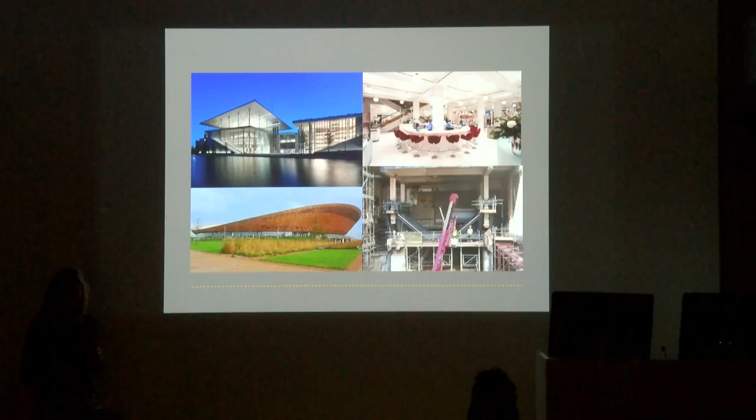And so they do a combination of high profile but also behind the scenes challenging structural and civil engineering, whereas the studio has only been going for a few years, much more modest. A lot of work in education, master planning, getting access to funds for schools, and doing refurbishment. And I think probably the thing that we're most busy in is repurposing buildings. There's a lot of work in London in that, and it's really quite fun. And that's where having engineers in-house with me is very helpful, because you can all work together in problem solving.

So we have a history, as Will said, of doing bridges, and the Millennium Bridge really probably almost before your time. 20 years ago, we did the competition, myself with the founding directors of Expedition while I was working for Foster's, and then went on to win that and build it. And lots of lessons learned really throughout the project, but also, of course, when it wobbled on the opening day, which was a real eye-opener in terms of never say never about the behavior of a bridge. They're like little creatures, really. Never quite sure what they're going to do. We went on to do this bridge in Stockton as the Expedition studio practice since that time.

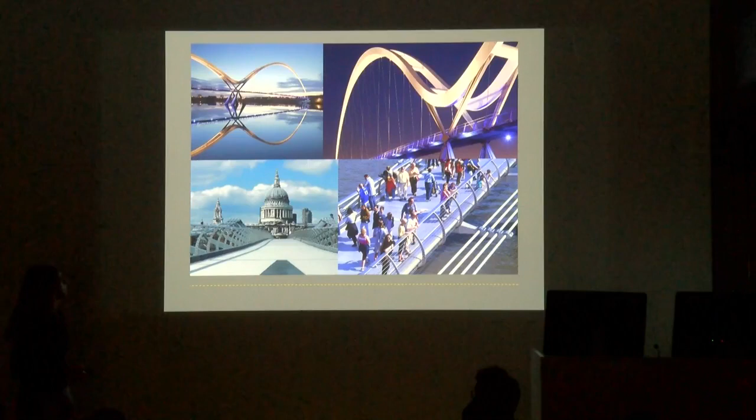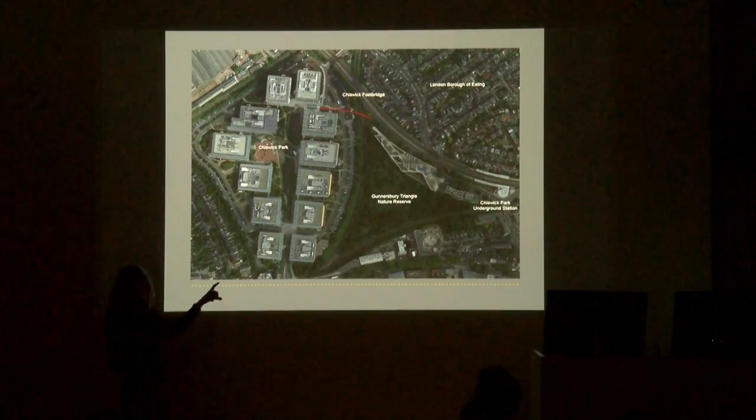And so this is an aerial of the Chiswick Footbridge that we'll be talking about today. And as Will said, this is Chiswick Park on the left. The red line of the footbridge, it's crossing between Ealing and Hounslow, so the challenges of 2 local authorities and the negotiations with those. Also the Gunnersbury Triangle, which is a much loved nature reserve. And then this big residential development, which was built in the life of this project. And the thing that I'll speak about is that it's actually been going for 15 years, the negotiations over this footbridge, and now finally due to be finished in the next couple of months.

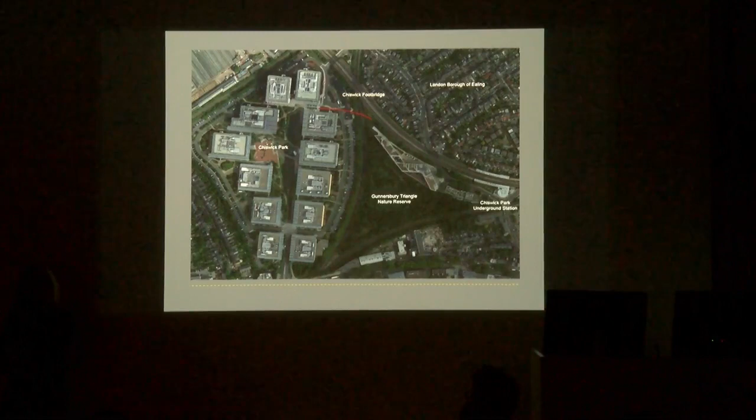So long, complicated process. And what it is, it's the outcome of a Section 106, which is an agreement which the owners of Chiswick Park entered into, where they promised, in effect, to produce this bridge before the end of their development. So it was reliant on building 8, which is right at the top end of the park, one of the largest buildings there. They can't let this building until this footbridge is in operation and available for public use. So the 15 years, they were aware of this, but they sort of put it off as much as they could, right up until the final window when Building 8 was built. And right now they've got to get their act together with this bridge. And it's sort of touch and go whether it was ever going to happen.

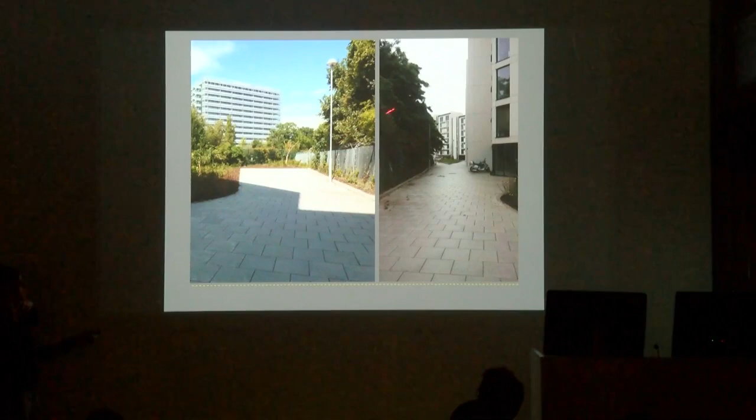And so the character of Chiswick Park is, well, it's got a fantastic landscape spine down the middle and all these buildings in a Richard Rogers style. The aesthetic is very distinct and continuous throughout, very stainless steel and crisp and tech. And we were aware of this when we were generating the scheme for Chiswick Park, and how you sit in the context of all those very precise buildings with your footbridge. So that informed the aesthetic. The other side is this very white, sinewy ribbon residential development, and this is with the abutment sort of sitting here waiting for a footbridge to cross a railway, as well as adjacent to a London Underground line at the top end of Gunnersbury Triangle.

So there's the railway, Network Rail, 24-hour operation of this railway line, and London Underground there that we scoot along the edge of. That's the residential line, and Chiswick Park. We also had a road with a very active bus network on it and a car park to cross. So very complicated. The only thing we're lacking is water. So we had every other context that we had to get across in the development of this bridge.

And it was required because this bridge had to be fully assembled on the site and lifted in one piece, fully built, because what you require when working with Network Rail is something called a possession, where you basically pay for a window when the railway is closed, huge sums, hundreds of thousands of pounds for 24 hours. You book it about 18 months in advance. Everything is geared toward this lift.

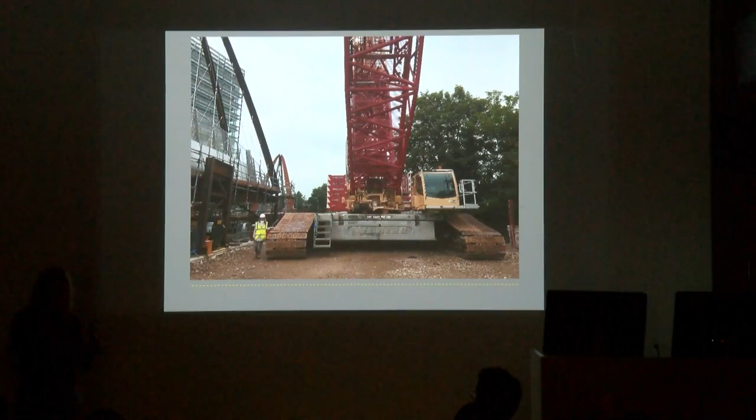And then this crane has got to do exactly what it's meant to do, and it's all pre-programmed. Its lift and its swing is all pre-programmed with computers. You've got backup drivers in case somebody has a heart attack or faints. So all the logistics are driving toward that, including the design of the bridge itself. This is it, going into position at dawn in the summertime. So everyone gave a huge sigh of relief when this primary span went in over Network Rail. So that was the ultimate goal, and now I'm going to sort of pick the bridge apart and explain why it is what it is.

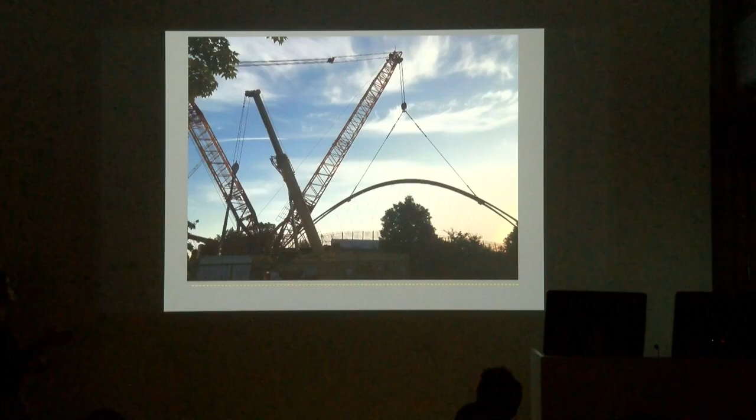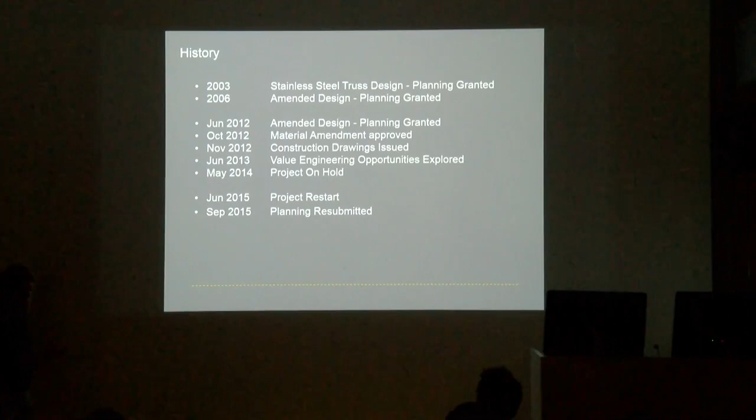But just to touch on the history, as I say, it started in 2003. We first started working on this project. And at that time, it was quite a different scheme. The client was Stanhope, who owned the park at that time, not Blackstone, who are the current owners. And the industry was different in terms of views about material use and sustainability. So the bridge at this time was actually entirely built out of stainless steel. And it was a very low slung structure, which meant it was working quite hard. Arches are much more efficient than low trusses.

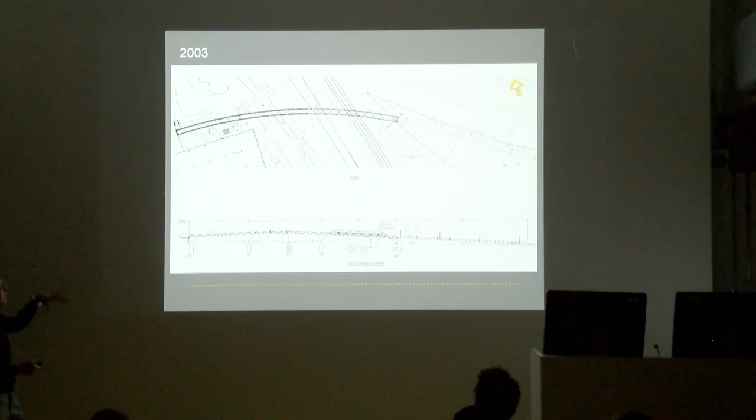And in the course of history, the bridge stopped really because the building stopped on the Chiswick Park site. And when it revived again, this is the stainless steel bridge, we thought, hang on a minute, here's an opportunity to revisit what we were thinking about. Is a stainless steel circular truss actually appropriate? Should we rethink? And as a business, we've been very involved in something called MEICON, which is minimizing energy in construction, as well as something called MAGIC.

And these are sort of professional pursuits around how to use less material in construction, whether it's architecture or any of the industries associated, but in structures particularly, there is a lot of evidence to suggest that things are very often over-structured, to be over-safe or to have a sort of load of disaster built into them, which means things are unnecessarily heavy, which means the foundations are unnecessarily heavy, the shifting around of materials is unnecessary. So there's a sort of pursuit for paring back. And that happened in parallel.

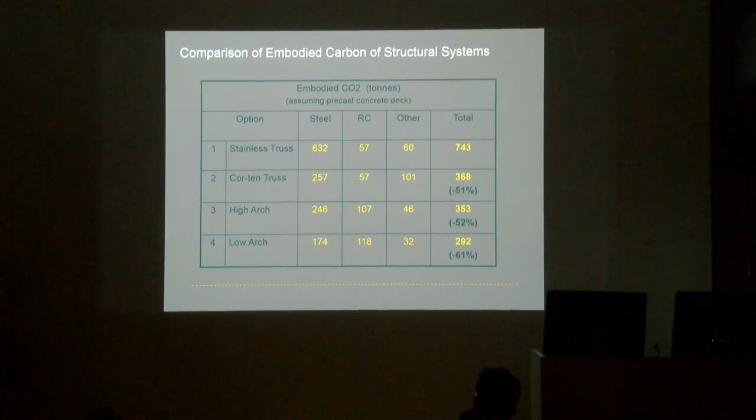So when we came back to this, we thought, right, here we are, quite inefficient, and we could actually be much more efficient if we were an arch. And we looked in quite a lot of detail at the embodied energy of the different ways, and you can see things getting more and more efficient and requiring less and less material as you go into the arches versus the trusses. So then in 2012, this concept emerged. We were then moving from Stanhope to Blackstone, who were quite pleased to have their own design of the bridge, and said, right, let's scrap the old one and pursue this one, especially if it's going to weigh less and potentially cost less and be easier to build.

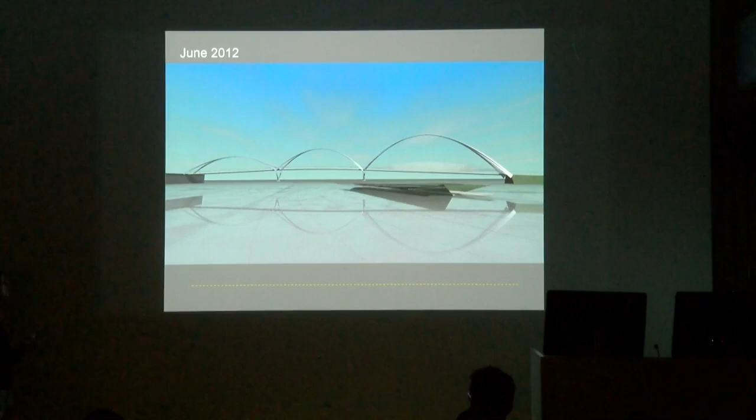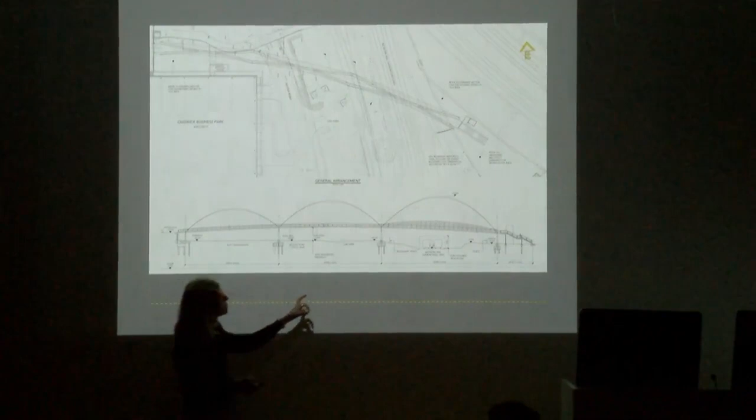So then this diagram needed to be thought through. And I should say there are three key spans, really, because we had to think about the three lifts, all being driven by this primary one here. I can use my gadget. This is the Network Rail line, and being mindful of that limited lift.

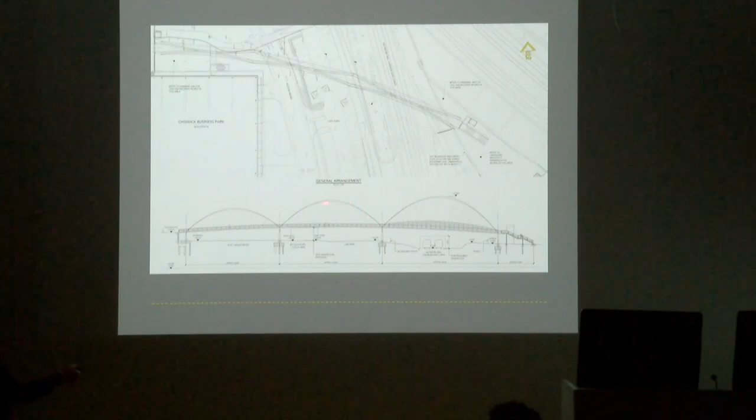So one contained span there, a footprint just on this side of the railway, another jump over the car park, and then another jump to get to this existing podium here at Chiswick Park. So we have to run right up against this building. So we've made a series of steps, and this one is the longest span, the highest arch, and it was a little bit of a journey in the changing character. Here we're mindful that we're in front of a building and not wanting to be too majestic in taking away the views of the occupiers of that building.

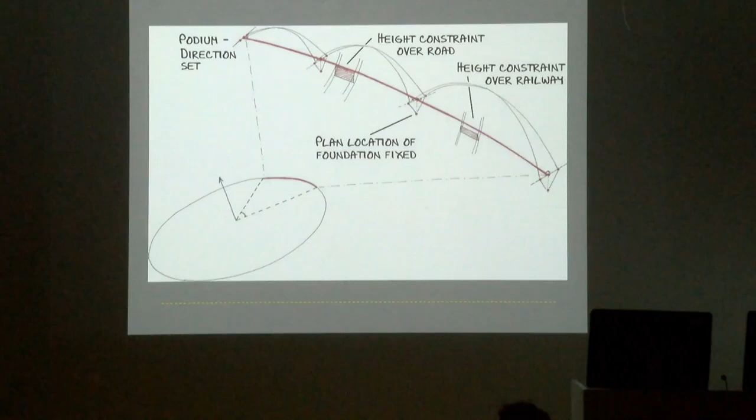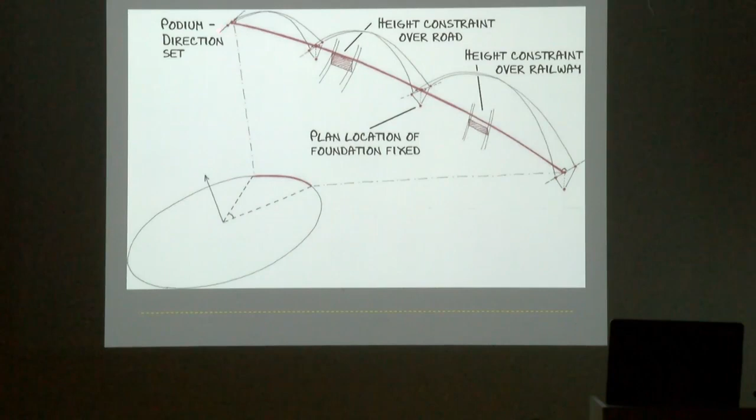So the same solution changes in character, and I'll speak a bit more about this little eyelid here on this bridge, which is very specific to Network Rail. We inherited a series of constraints, which is typical of bridges. As I say, we have to get over the railway. We need to get over this road. There were some existing foundations which were built quite early on in the life of Chiswick Park, and then the podium was sitting there waiting for us for these 15 years.

And having considered an arch, this was then when we went into intense analysis of how to pare back the arch. So not just any old arch. We wanted to use corten, which has very interesting characteristics in terms of maintenance, which I'll speak about in a minute. But how can we get the finest, slimmest arch ever achieved? And this is because bridges are just another version of having to span like a floor plate. The thing about bridges is you really do want to be super pared back in terms of material. And you need to really last for a very long time.

A typical life for a building is 35 years. For a footbridge, it's 125 years. So you've got to be thinking, how can this thing survive with very little maintenance? It's a piece of public infrastructure, so it'll probably take a beating, and it must be there in 125 years. And you then have to demonstrate this to all the interested parties and stakeholders in Network Rail, and you have something called a Category 3 check. So with a bridge, it isn't enough that you engineer the bridge yourself. They then employ a completely independent set of engineers to review everything you've said. So this sort of rigor becomes much more significant alongside our interest in paring back materials as much as possible.

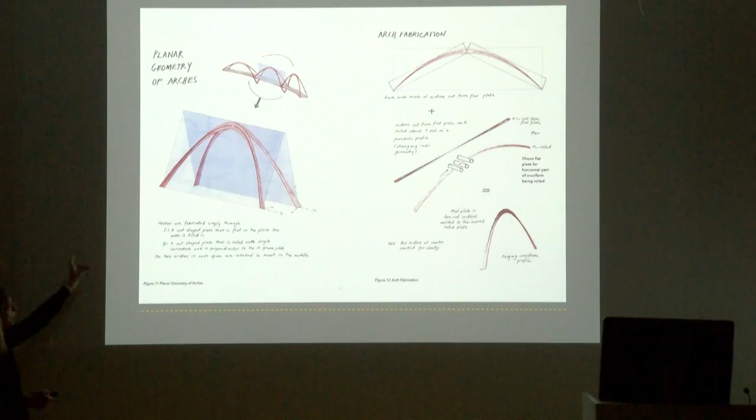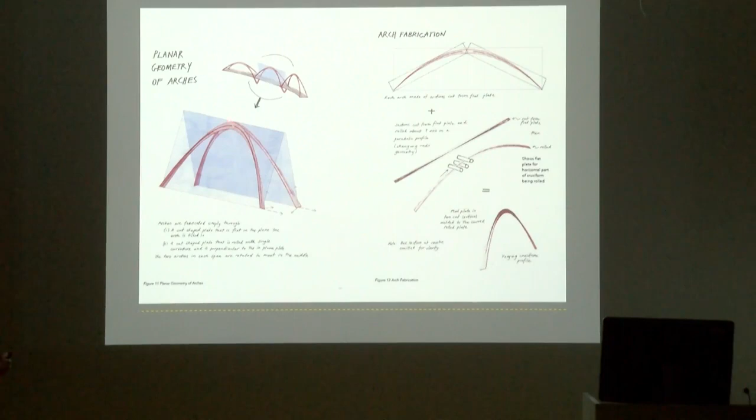So the arch is actually a cruciform shape. It starts quite wide at the base with a sort of flat spine, and then as it goes up to its primary apex, it's a very tall spine with an almost negligible flat portion of the cruciform. So it changes its geometry across the bottom here in that character. That's directly related to the way that the arch is working in terms of its force, whether it wants to do this or it wants to be that. So this is all in this pursuit of paring back. So rather than just a big box section, it's actually a skeletal arch.

So corten, again, it's an American brand for weathering steel, which is that very distinct orange looking steel. And the beauty of corten is that it comes out of the shop, and for us, the plates were delivered to site looking totally gray. And within a matter of hours, it begins to form its own inherent rust. And that rust protects the steel from any sort of degradation. So it's a sort of natural seal, and it has that orange character, and even if you scratch it, it reforms itself this protective coat. And what that means critically for bridges is it doesn't require any painting.

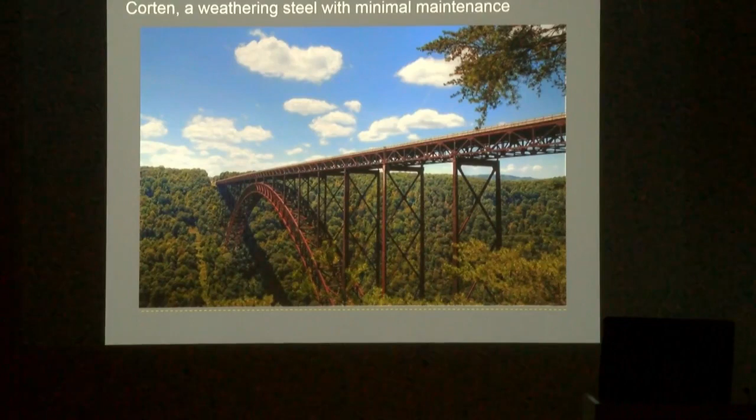So with these sorts of things, you can imagine trying to get back there and paint that and inspect it for corrosion in the connections, virtually impossible or very, very difficult and challenging. And when you're over Network Rail, you don't even have that option. You can't afford to have a possession of £100,000 every time you want to go and inspect the bolts and do a quick paint. So this thing had to be absolutely self-maintaining, hence the desire to use corten steel.

And again, this goes back to my point about the Rogers scheme, very, very crisp aluminium and stainless, and us wanting to be distinct. We would never be able to get the bridge to be as pristine as their beautiful cladding and stainless steel. So let's choose actively to be something different in character. And we do have a lovely engagement with the landscape at the top of the triangle, so it begins to take that character rather than that of Chiswick Park. And these are some images inside the triangle, very natural and wild.

And this is the animal beginning to be formed as a concept with the primary structure in corten, as I described, jumping over the Gunnersbury Triangle in that image and into Chiswick Park. That's the building which cannot be let until this bridge is in operation. So it's sitting there fully assembled and empty at the moment.

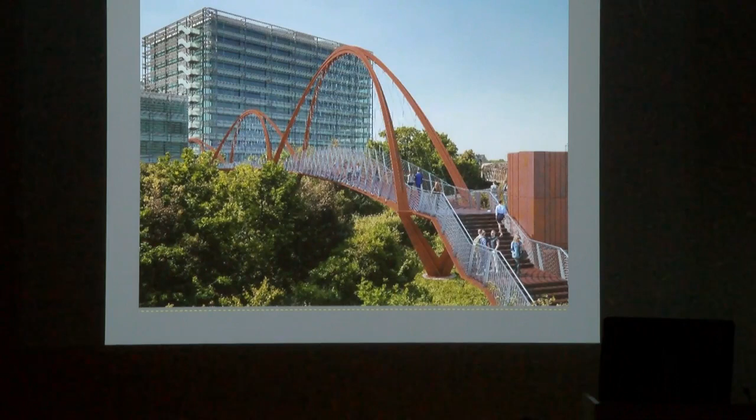You can imagine the money lost while they wait for this bridge to come to life. And it has already taken on this beautiful orange quality, which is really very distinct. And we had to do a lot of views, actually.

It does exist here, I just show this because this is an example of the interest of stakeholders. The Gunnersbury Triangle interest group were very anxious that this bridge not be too dominant when they were in their landscape. There's a lot of bats who live in this triangle, and they were very worried about the impact this bridge may have on their well-being. So all those sorts of concerns had to be managed.

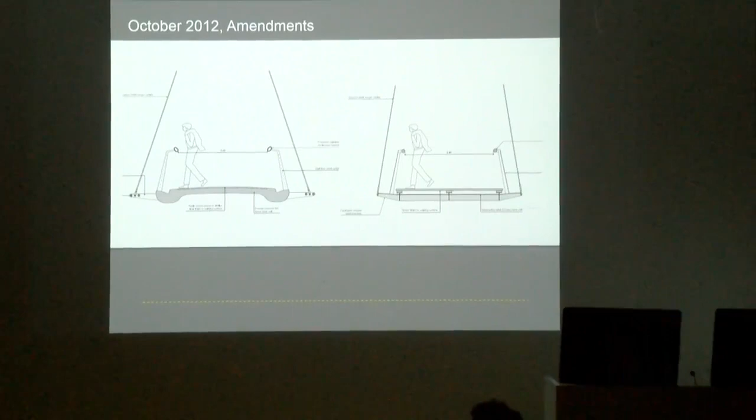Some other things happened over the life of the project. We didn't actually go to a corten deck in the first instance, we started with a concrete deck, and I think this is typical of designers - the longer time you have, the more you feel you can tweak things. So we had this 15 years, it stopped and started. We moved to corten, and then we had concrete. We thought concrete's not as environmentally friendly as it could be, and we've already got steel, so we started with concrete, and then had a review and went to corten.

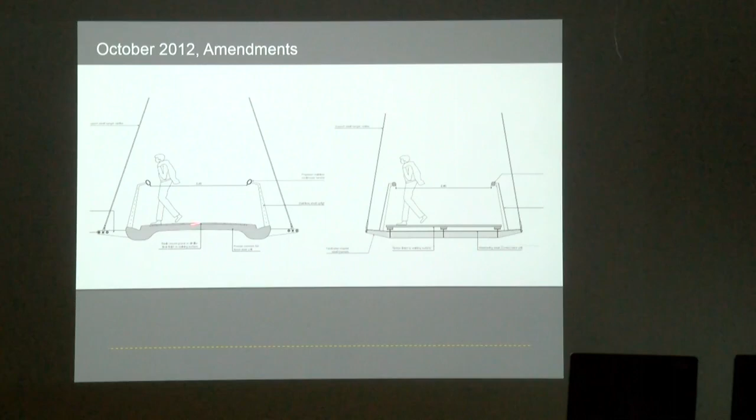This weighs even less because we were able to cut out all the weight that forms the depth of that slab, to get it to be self-spanning across the 2.5 meters. It's now a series of plates. The deck itself is literally just a single plate of steel with a series of stiffeners - super thin, stiffening edge, and then timber, which is self-spanning itself, hardwood sitting on the top and upright. So trying to pare it back to the minimum amount of materials and the minimal palette of materials as well, and all things that last forever, really.

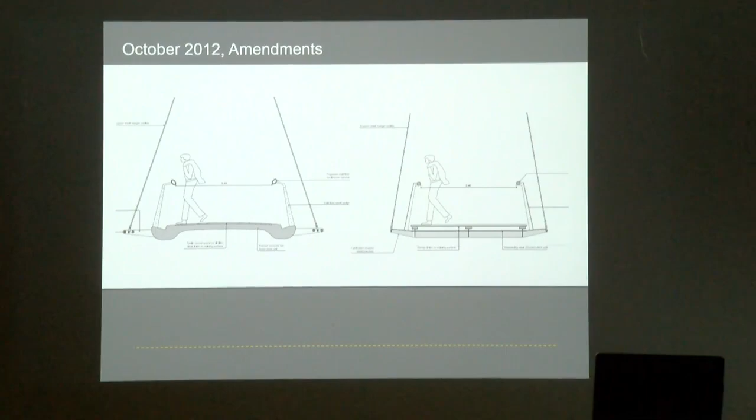We look to the Stockton Bridge as a sort of precedent for how we'd achieved this before, and how it can have much less impact on the eye line, really, mindful of people's views, and again, the people in Gunnersbury Park, paring it back.

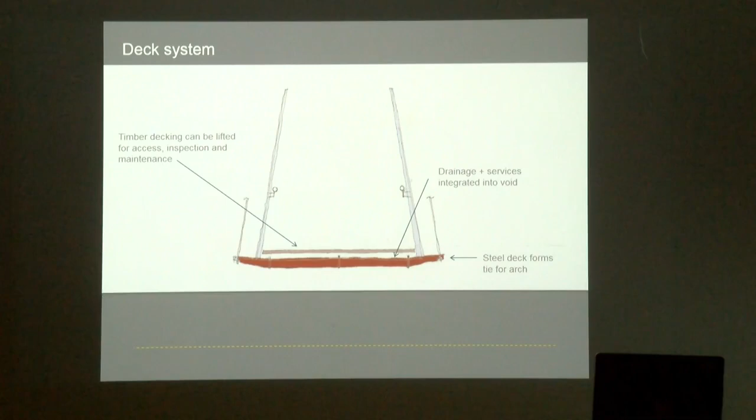So that's that diagram - the drainage. It's self-draining, the deck, the water goes through, the bridge is on a continuous camber, so it drops through the holes in the deck and then flows to either side and then off. You have to be able to manage any water that this thing collects - can't just dump it onto Network Rail or onto people's cars in the car park. It all has to be collected and then channeled down at either end, the whole quantity of rainwater on the bridge. So you're then integrating civils, you've got rainwater experts, you've got to be sure you've got a walkway that you can walk on, structures - all those guys working together in the same interest.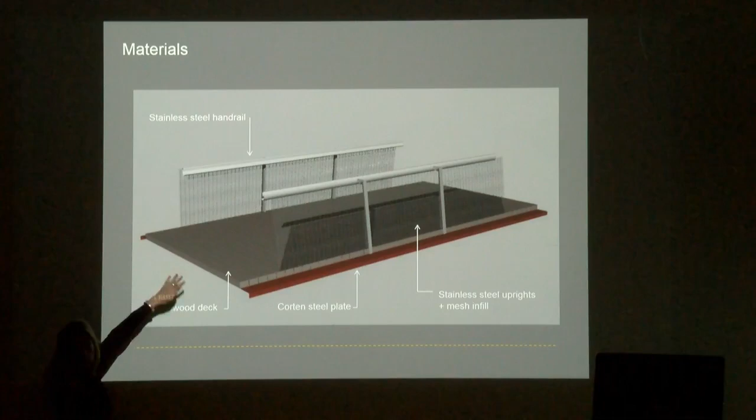This begins to pick up what this material palette is. So here's this plate, the corten plate, set with spanning hardwood deck. This, being mindful, it can't be softwood if it's got to survive 125 years. And then all other materials which make up the balustrade system are stainless steel - again, something which is self-weathering, isn't prone to corrosion, very tough, and has a very long life. Even the infill between the uprights is also a mesh comprised of stainless steel. So three materials, and that's it.

This is a mock-up. To be sure that the interfaces were really resolved, we built a one-to-one mock-up. You can see the profile of the corten, the beginnings of these stiffening fins, checking the welds, checking what the character is of the underside, and then how to get, in the simplest fashion, the build-up of the timber and the fixing of the uprights.

And this is really a lesson. Again, we did a lot of research leading up to the Millennium Bridge, and that's a much longer bridge, 3 times as long, and it doesn't benefit from the same surveillance. But bridges take a real kicking - people are just prone to sort of shaking them around and kicking them about, and you have to be mindful of that. They also steal things - a lot of them have had many of their light fittings stolen.

So you have to be mindful of what can look, if it can, look better over time, but withstand that sort of hard work and still have a level of elegance. And it's trying to work that through, having special fixings which can't be undone, and also trying to dissuade people from climbing out on the side and doing things which are a bit mad.

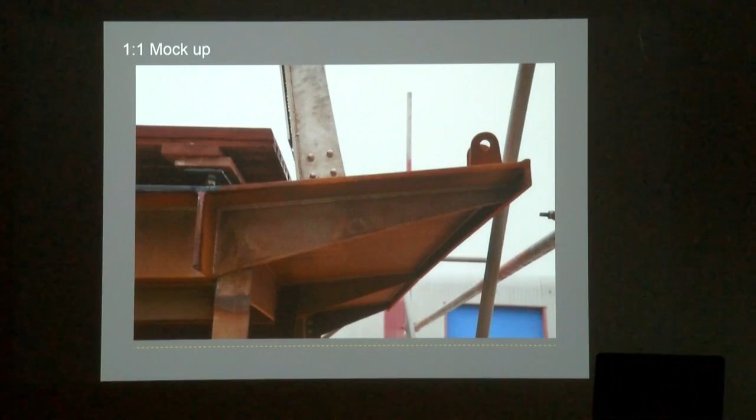And I still see, to this day, I cross the Millennium Bridge and see people's footprints on the cables - you know how the cables go out to the side over the Thames. Whatever you do, people will still go out and walk along on those cables, which is mad. You can see the footprints because they've got protective paint on the cables, and it leaves the impression of those shoes. You can only go so far, but if you can try and dissuade people from doing that in your design, that's also helpful.

So this is what the underside looks like. Now the 3 spans are in position, but you can see the sort of skeletal belly to the bridge, and it really hits home just how unbelievably slender and light this thing is. There isn't a single piece of extra steel, really. We've been very rigorous, and it's taken a lot of modeling and a lot of convincing. In fact, Severfield, who have built the bridge for us, were not convinced that it would work. So when they inherited the scheme, they did their own version of a Category 3 check to convince themselves that it was actually going to be possible.

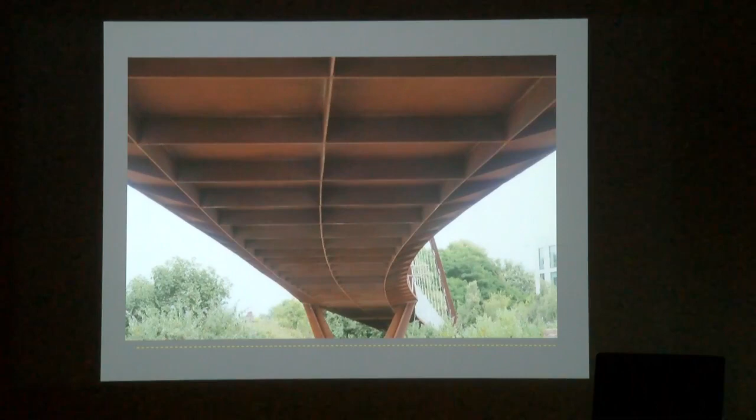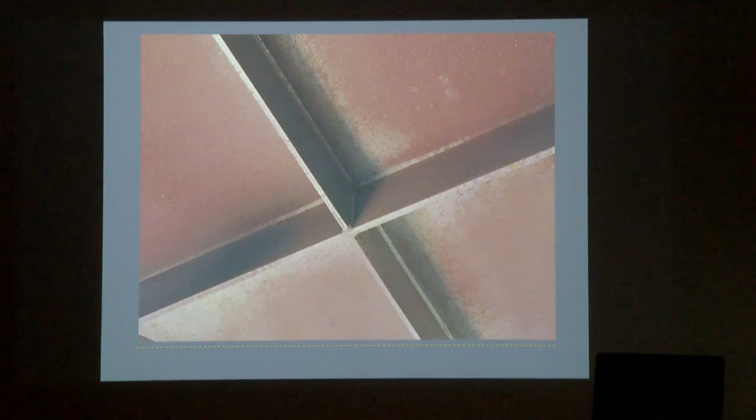And it has given you this really lovely soffit that you now experience in the car park and in the road, and this lovely cruciform detailing. It's really about getting the guys and girls building the bridge to love the welds and take as much care in the fabrication of this thing, and be mindful of the delicacy that needs to be maintained if possible.

Another thing that changed over the life, and this is very critical to the bridge dynamics, is that the cables changed. We started with vertical hangers like on the Stockton Bridge, but throughout the course of testing the dynamics, which we're now quite aware of having survived the Millennium Bridge, we began to experiment with cross cables - this is actually called a network arch. These are very rare; people don't tend to do them. I think there's a couple other instances in the UK of this type of arch, because the cables are working very much in conjunction with the arch and the deck.

I should say the deck has structural stiffness in it, so that's why those little blades are in it. It's not to carry people's weight, but to give the deck enough stiffness to hold it out and to hold the arch out at the ends and to hold these spreader angles of cables. It takes a lot of analysis and a real rigor in the design process to get this to work.

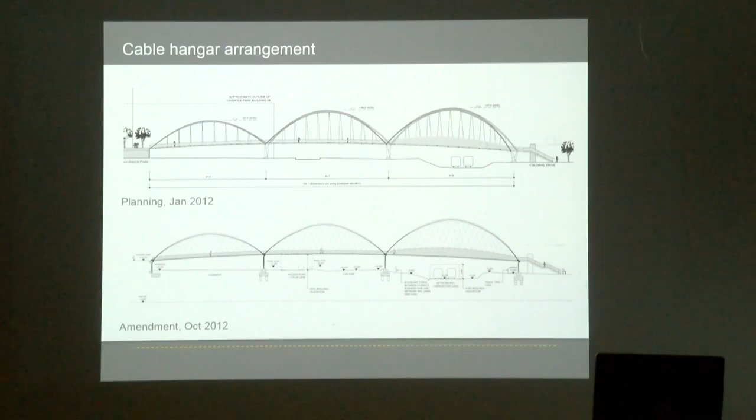But what we found was that we hope, although I never say never, the conversion from a vertical cable to a cross-network cable means that we do not require dampers. The bridge is super stable and steady and very tightly tied together through the character of this network of cables.

And this is a built condition of the top of that arch. Again, you can see this pushing the hole in the arch all the way to the top as much as we can. It comes up as two legs, joins and kisses at the middle, and then back down into two. Again, paring back every piece of material - it probably started down here, and nibbled right until the very end for minimal steel.

And here's a visualization, but it looks very much like that in life, of these two kissing members dropping down again. You can see the cruciform profile changing in its character, and in this mesh sort of lattice that surrounds you as you go. That comes down either side. The cables are 16 millimeter in diameter.

And this is again something which this bridge shares with the Millennium Bridge. These aren't a spun cable - they are a locked coil cable. It's a much stronger cable, super dense. If you look at the cross section of a spun cable, there's a lot of fresh air in the cross section of that cable. These are very strong and effective for achieving that super stiff arch that I described for the design.

These little members, which exist every time the cables cross, are also significant. It's lovely, you get to engage - these are built by an Italian outfit who do all the work for the ski lifts, and they're sort of masters in managing little beautiful bits of jewelry almost associated with ski chalet lifts. But what these do is they stop the cables from rattling. If they start jangling against each other - I don't know if you've ever been to a yacht club and you can hear all the sort of stays jangling against each other - we were mindful of the noise, but also the fatigue that might put the cables into if they're constantly shaking against each other.

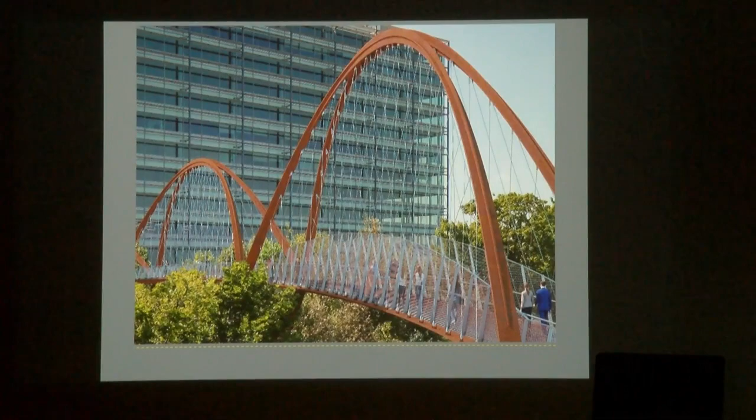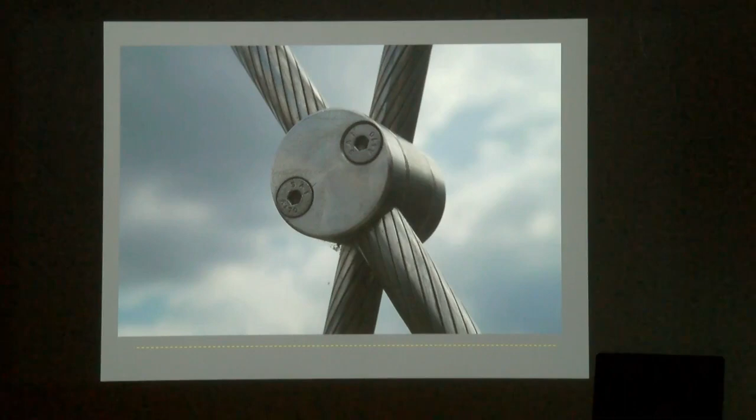These little things had to be custom made for every junction in the cable, of which there are many as they go across the network. Surprisingly, this is where you sort of learn as you go. They're adding an additional level of strength to that network, which forms the tight, stiff arch.

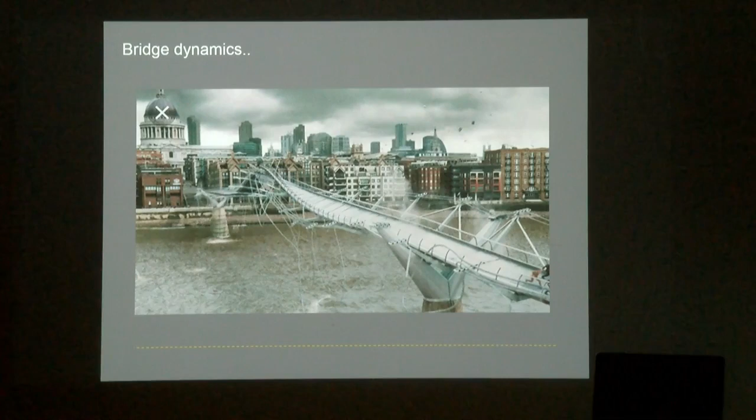Just a little bit on dynamics. I mentioned this because they blew this up in the Harry Potter film, which was not what actually happened, thankfully, just a film. But as I say, we did have to go back and retrofit these dampers to the underside of the soffit. Two different types of dampers actually, mass dampers as well as viscous dampers that we had to put in. So quite a lot of retrofit work to get the Millennium Bridge to calm down.

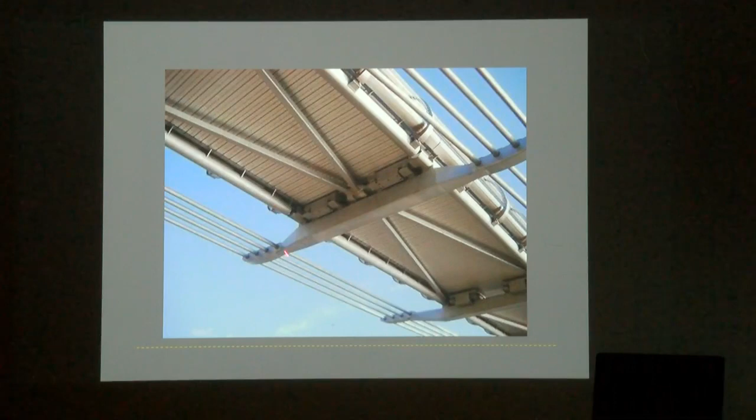So now I'm going to move on to the deck. I spoke a bit about the timber, I was trying to work through the different materials. What we wanted here was for the timber to be not just a finish, but to add another level of importance in the makeup of the bridge. So its weight is quite important. Hardwood is super dense, so it then adds to the ability to settle the bridge down.

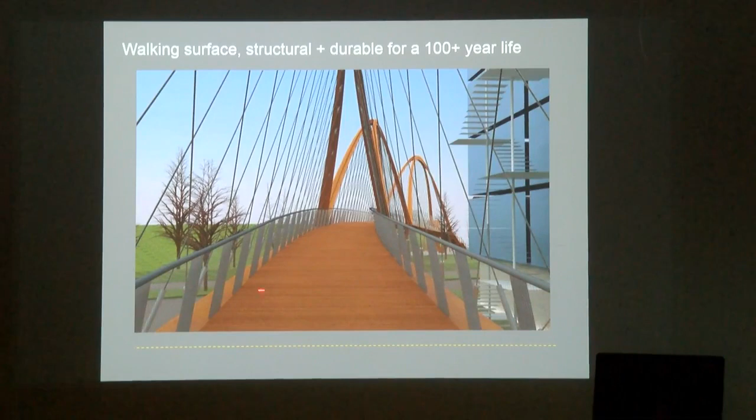Not enough though, again it's this fine balance between what you want to lift up and move over a railway with a huge crane, but at the same time be beneficial. It has a very long life, it's self-oiling, it looks after itself, it weathers to a natural grey. It spans beautifully from side to side with one support in the center, and it's a sort of structural finish. It drains through the middle, as I say, and it also forms your final walking surface.

So doing many things all at once, inspired by the Pont des Arts in Paris, which has been there for a very long time, with a much thinner profile, but a hardwood deck.

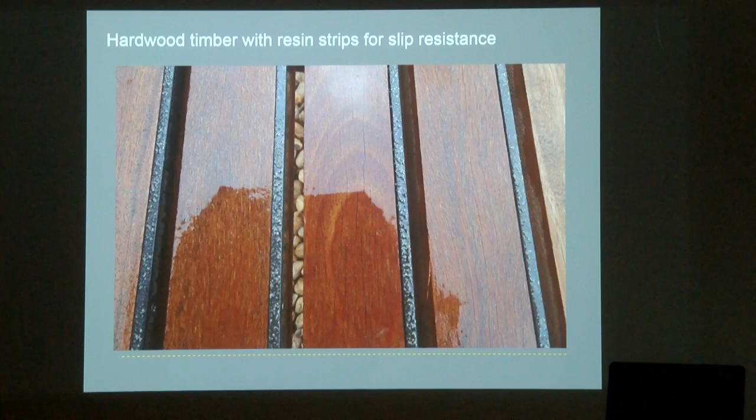We looked at a few different systems for how to integrate slip resistance, because the trouble with timber, even a hardwood, is that it gets very slippery when wet. So we had to be sure we had the right sort of gap for the draining and enough frequency of these slip-resistant resin profiles to get code-compliant slip resistance in wet conditions, especially because the bridge is on a camber, so you're then going downhill in the wet. And we needed to test all of this.

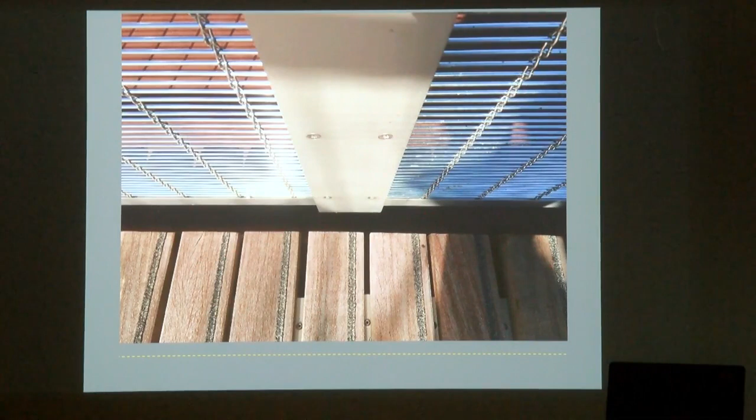This is the sort of color that the timber will weather to naturally over time. It's already begun to do that, in fact, a sort of silvery grey. You can see it here in the built condition, stainless steel, corten deck in the distance, and then these planks already beginning to weather on the bridge itself.

This was a big driver for the characteristic of the balustrade system, in that Network Rail are very anxious about people throwing things or themselves onto the railway and stopping any rail traffic from happening. Their default is to do this sort of thing with their bridges. We started the dialogue with Network Rail, and they said, you've got to absolutely cage over the top of your bridge, you've got to have a complete enclosure, it's got to be X meters tall and absolutely enormous, and that's the end of it.

We thought, well, if we basically asked the question, if we can demonstrate that we're adhering to all your criteria with a different solution, will you accept it? And they sort of grumbled a bit, so we took that as a nod, and then went down a long path of demonstrating that you don't have to have a cage over the top of your head, and that you can produce enough protection without doing that, because we were very keen not to lose the sense of the sky. I think there are a lot of security problems when you put a cap on an enclosure. People don't feel very safe going down a route like that, so we were absolutely determined to pursue minimizing this criteria as much as we possibly could.

Just going back to this cross section, this is a typical condition of a balustrade, usually quite high on footbridges because people feel a bit exposed. It tends to be around 1.2 up here, and you can lean on it.

They get a bit nervous when it goes down to a typical 900 to a meter. But what needed to happen over the railway, at least where we negotiated, is that in the most extreme case it had to come right up to near 3 meters. So rather than boxing up over the whole length, we negotiated to have an eyelid shape. We agreed to go up to that height, but keep it open to the sky.

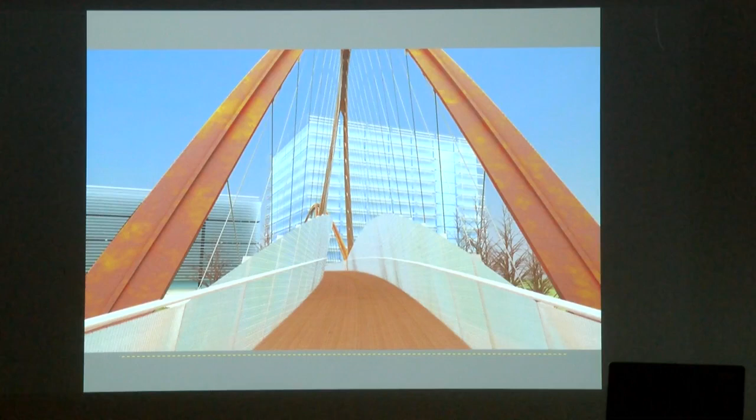That's where the sense of this scallop shape began to come into fruition. Because the bridge is not only on a camber but also on a curve, the geometry is quite complicated, so you never get that long tunnel vision. It's an emerging experience, and we modeled the bridge in 3D and checked the walking environment, convincing ourselves it would feel really pleasant.

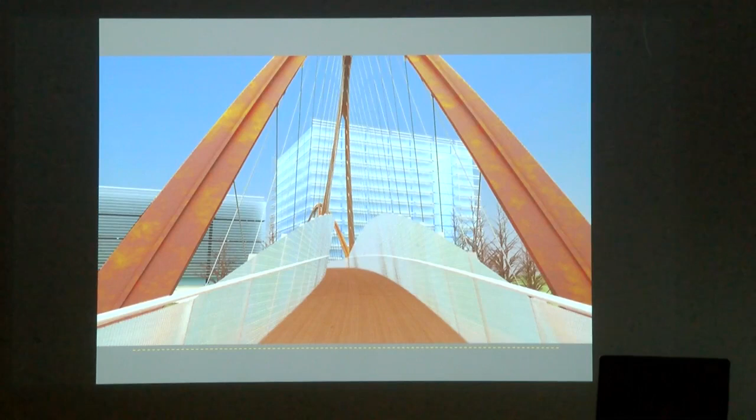We were then very keen to have a dense enough mesh so people couldn't throw anything through, I think the criteria was a 6 millimeter opening, so you can't get anything significant onto the railway. Our mesh had to meet that criteria, but we could still see through it. So children come along and get a long view of the railway, can see the train coming, rather than reverting to a solid balustrade, which is Network Rail's default. Very important to get these things achieved if you can. So that's the character of that mesh.

Another thing that came to light was that we'd convinced them to have a completely open, mesh-filled balustrade with that level of visual link all the way across. But halfway through construction, they came along and said, actually, we want to future-proof this bridge in case we go with overhead electric railway lines, and you need to make this balustrade system solid. You can imagine that thing landing on the project that late in the game, when we're virtually building it.

So it was back into heavy negotiation with Network Rail, and in the end we got a compromise: there's a level of completely solid stainless steel panels, up to about this height, over the critical width for Network Rail. But we negotiated that they're on the outside of the mesh, so when you're on the bridge yourself you barely perceive them. You get a long view, it's quite dense, but they're out there to satisfy Network Rail.

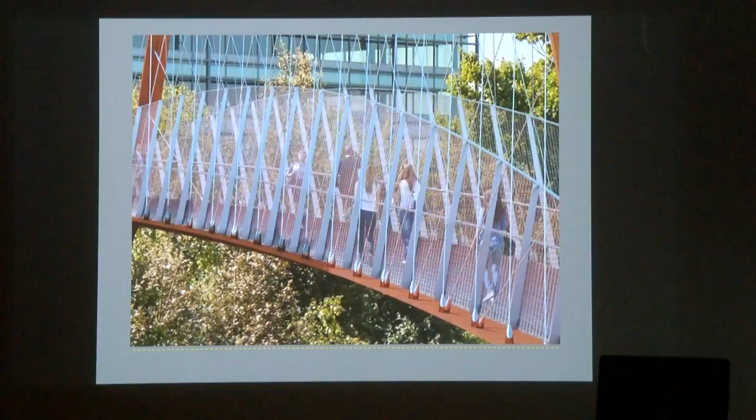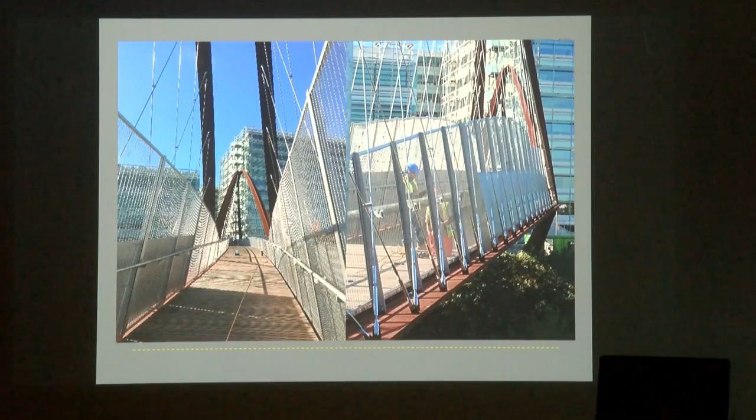We did mock-ups to test all this and make sure it was durable, and here you can see what I'm describing in the built condition. It sparkles in the sunshine beautifully, actually, but here you can just get a sight of those dreadful solid panels that we could not get rid of for the life of us. Just there for the maybe-never-needed case, just in case Network Rail goes with overhead railway lines.

Just a little bit on landscape, because it's not just the superstructure, the civils, the lighting, the drainage, but you get involved in how these things land at either end. Two quite different conditions: Chiswick Park, very heavily manicured, a business park on one side, and then a bit of no man's land at the top end of Colonial Drive, which is a big residential development.

At this end, we had to integrate a lift because the levels were so high, driven by the clearance over Network Rail. We couldn't get down without taking the bridge miles over if we used a ramp. So we had to integrate a lift for access and buggy users, alongside a series of steps, and then had long conversations with the police, since this had to be compliant with Secure by Design.

Very worried about rough sleeping under the bridge stairs, a very popular place for people to camp because they tend to be dry and untrafficked. So we ended up in a long debate about how to deter this, and ended up with a great big swathe of what's called defensive planting, basically very horrible prickly bushes which go all around the bridge here at the top end, right up against the London Underground fence, combined with horrible cobbles. This is the condition we're designing toward, with a bed of glued-in boulders so people are dissuaded from trying to sleep under the bridge as well.

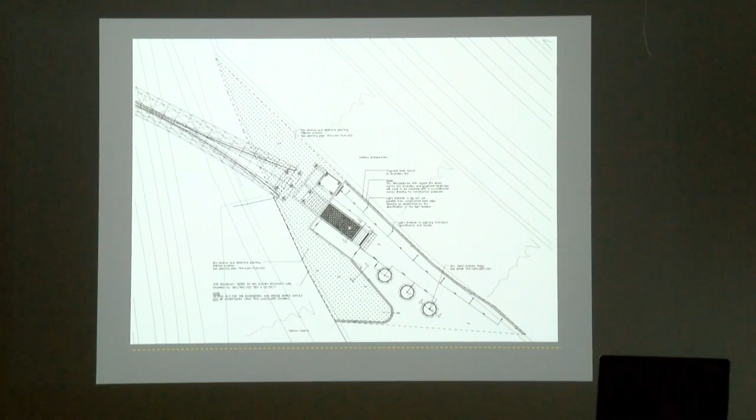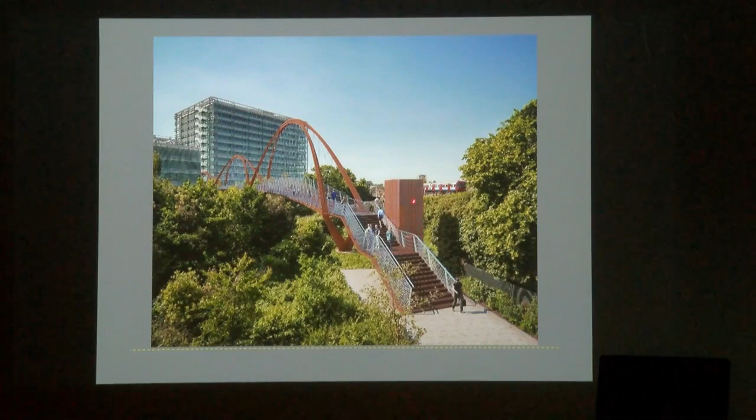So you have these sort of slightly crazy influences into your design all the time. On the stairs themselves, we decided to do a corten lift shaft as well, a little baby corten building on the site. And then these important stairs.

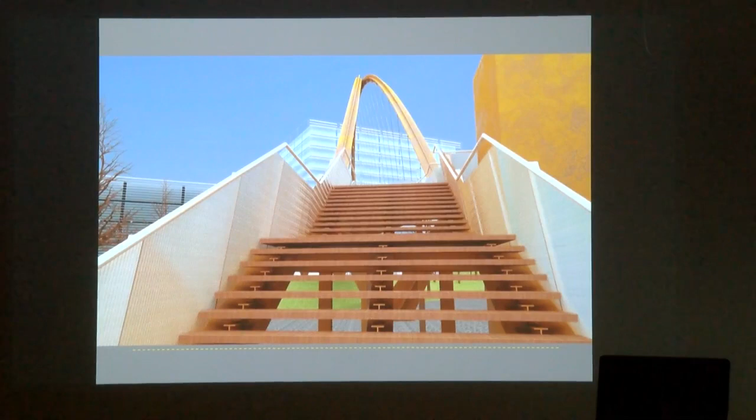Then there's a conversation about regulation, which dictates that if you have a stair that wide, you must have a central balustrade. We were reluctant to congest the stair with that detail, and had a very proactive consultant working with us around disabled access and what's reasonable for infrastructure, and we were able to convince the authorities that the rail could go. I suppose the lesson is that you're given a lot of regulations and code, and it's always worth challenging. If you've got a convincing argument, don't back down, especially in pursuit of less material, something more sustainable, with a longer life, or just a more pleasurable scheme.

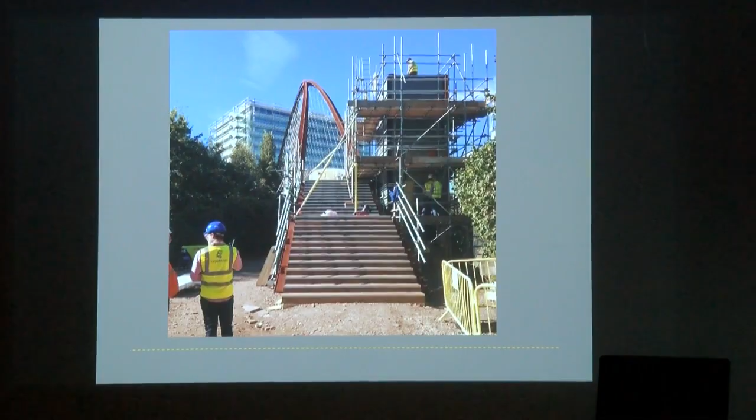It's a good mindset. There it is under construction, still finishing up on the podium. There's my tray of boulders I was talking about, surrounded by granite, a very uncomfortable bed with adjacent prickly holly bushes next to it. So let's hope no one chooses to populate that space.

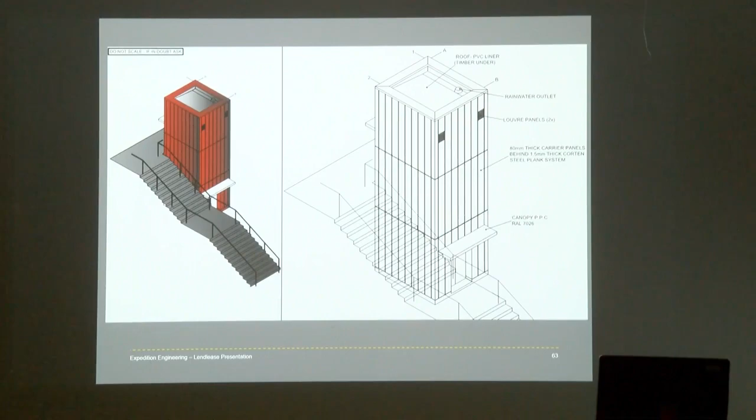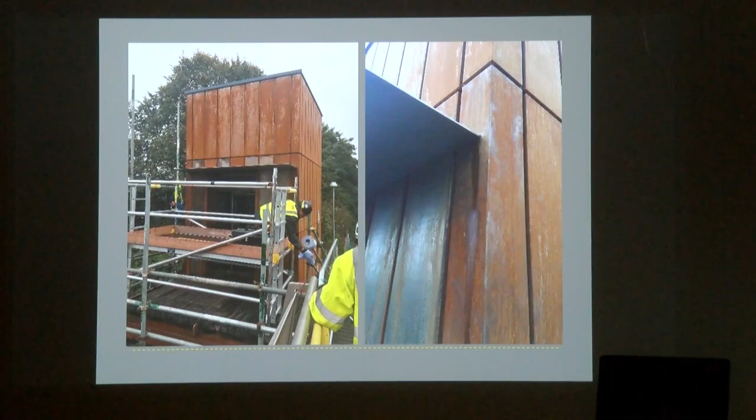Just a tiny bit on the lift itself—it's a whole entire building. It's an external lift, so the shaft had to undergo weather testing with a massive hose last week. So you actually get into a bit of proper architecture here. It's lovely to see the Kingspan panels arrive on site totally grey, and within a matter of hours they're already taking on this orange patina you can see. This is in progress, with a very slender stainless steel lid forming a tiny canopy over the entrance at deck level and down at the bottom.

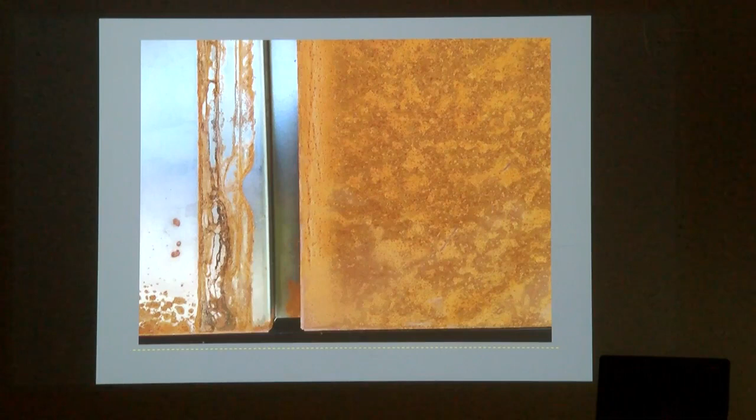Here you really want a continuous camera watching this stuff—you can virtually see it converting to lovely orange, getting that quality in its end condition. The reality is it's probably going to take about 6 years before the corten actually reaches its final pure orange. So it's going to be a long time coming, weather dependent. If it rains a lot, it will happen more quickly.

Just finally on the lighting—also very important, another discipline that needs to enter the frame. This was done with Speirs and Major, and here it goes back to the bats. At Gunnersbury Triangle we were very worried about light pollution over the nature reserve, and had to balance that against what feels safe for a user on the bridge. You're entering onto something 120 meters long and can't see the other end, and as a user you need to feel secure making that journey, because once you're on it you've only got 2 ways off. That's very much in people's minds, and because it's open 24 hours a day, it's a gift to the public realm—it's not managed or closed in any way.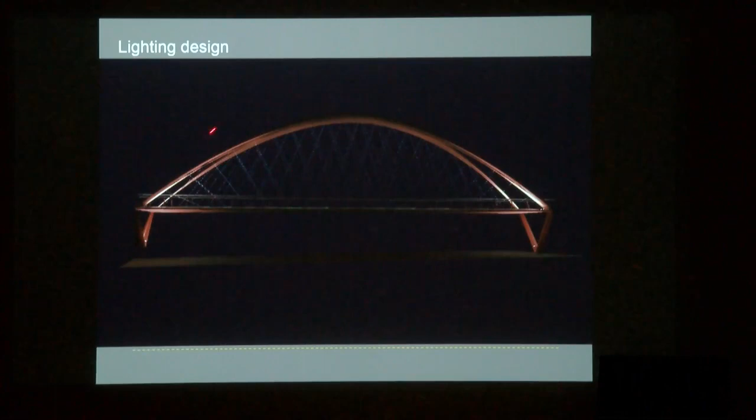You have to be mindful of giving enough security without overwhelming the bats. For us, it was never about being a big glory bridge—it was meant to be fairly discreet in the landscape and part of that tree canopy. So we were quite happy not to have a massive glowing arch. What we've ended up with is a tiny bit of feature lighting that throws itself up the base of the arch but peters out quickly, so it sits in the dark of the tree canopies with bats happily living in and amongst it.

But we've focused our efforts very much on lighting the deck, so the light doesn't come up except through reflection from the timber, and that's so you don't get any glare in your eye line as you go along the bridge.

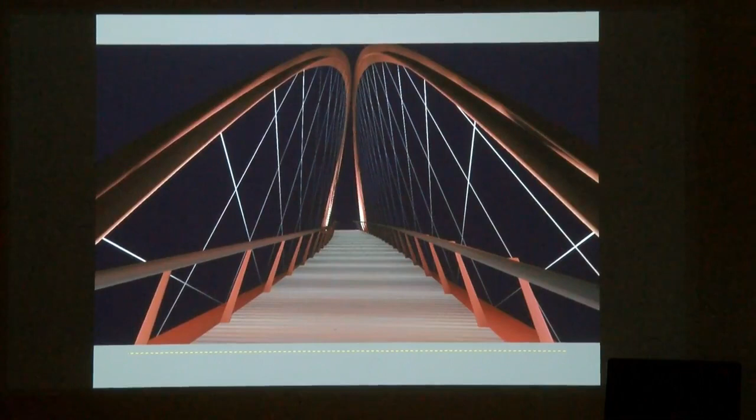So you in effect look into what is quite dark, but the surface is very clear and there's enough bounce back. And this is something that we test in computer modeling, but also on the mock-up, as to whether we're satisfied with that level. And what we've got are hundreds of little, in effect, fairy light spots that sort of twinkle in the underside of that handrail.

And that means that the handrail itself, a stainless steel tube, can act as a conduit for all the power lines, which come up the upright at one end, go the whole length of the bridge, feeding all these little lights, and then out the other end. And going back to vandalism, one of the drivers here was that the lights are out of sight, therefore people are less inclined to steal them. They have to actively get underneath the handrail, and they need a special tool to loosen this. And if you make it that much more difficult, you're hopeful that they'll stay there for longer.

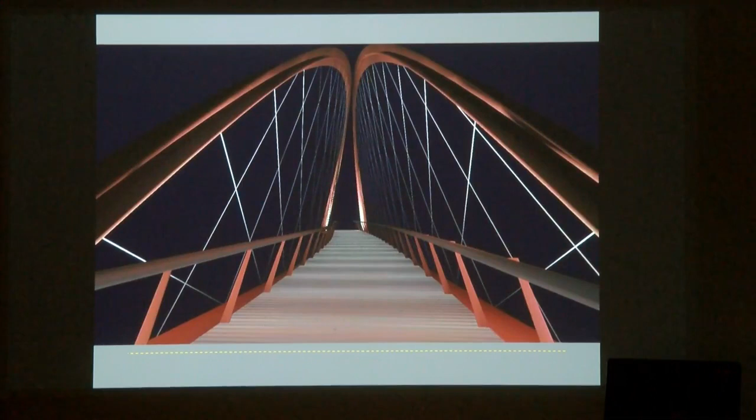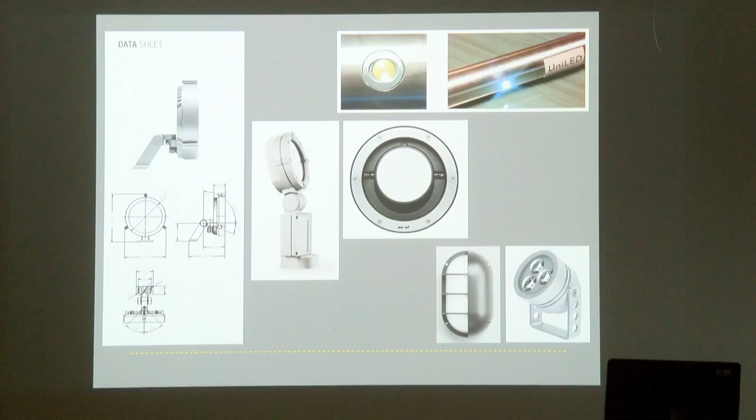They're all LEDs, I should say, so they've got a very long life in the bulb and lower energy usage. Tiny bit of feature light on the underside of these little support legs, of which there are 3, but pretty low-key and pared back in terms of fittings. Those are the little lights set in the handrail, and these are the spots which throw a kind of cone of very specific light up the base of the arches. And a bit around the security anxieties at this end as well.

So just to end, really, I don't know whether I made it clear enough, but the context of the bridge is such that there was really no place to build it. There was no place to host a contractor, so it had to be assembled in a super small area immediately adjacent to the abutment on the Chiswick Park side. We managed to negotiate a few parking spaces over a period of time, and we could only build it span by span. There wasn't even room to have multiple spans, so we had to fully assemble a span and lift it in this very tight window with everything on it. Even the light fittings were on that bridge, so it was virtually wholly constructed, and needed to get up in this 24-hour window. And this span weighs 90 tons.

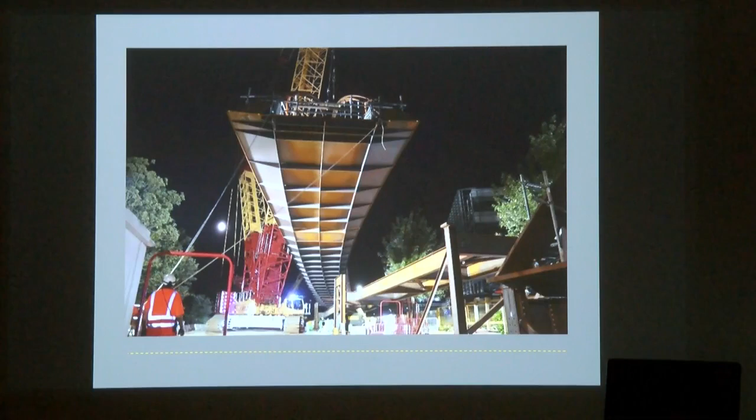And what was quite incredible, they did it in the summer, as I say, it was a 24-hour shift. It started at 6 p.m. We all went down there and spent the whole night watching this thing happen. And what was amazing is this crane's driving around, and what they said to us is that the minute they lifted this off its temporary jig, they couldn't put it back down again. The whole thing was designed to take a shape the minute it was lifted, and then all it wanted to do was go onto its legs, and it couldn't return to this jig, which sort of collapsed as they lifted the bridge. So there were a series of stop points in the process, and the minute that they lifted that, there was no going back. So quite a hairy night, and it went up in the middle of the night.

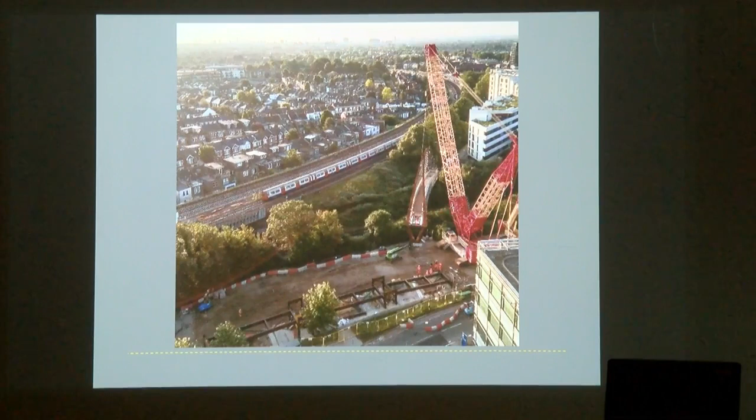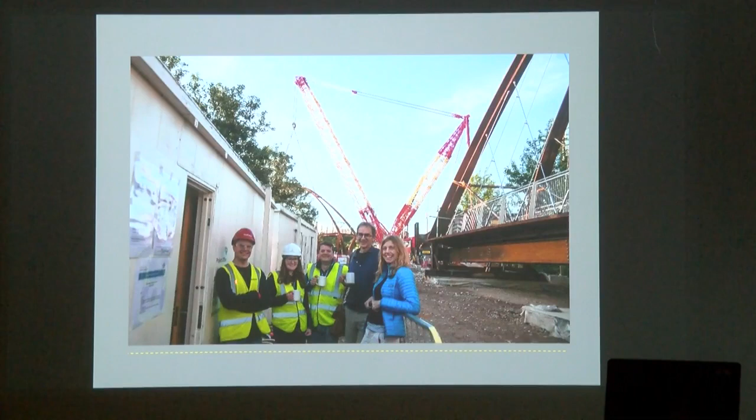It was driving around, and it's moving toward the change in rotation, really quite cartoon-like, a couple guys at the end of ropes just moving this thing around as it's swinging 90 tons over all of our heads and Network Rail. Got a bit caught up in the trees, which no one expected. Just a few moments with a chainsaw, and then it dropped. And there it is. In the morning, the crane had to drive along this route here, carrying this 90-ton span, and it dropped in beautifully on its legs, ahead of schedule actually, which was great. And there we are that morning, drinking our tea, very happy, engineers Charlie, Eva, George, Chris, and myself. And with that, I will stop.

Sorry, no one interrupted with a question, but anyway. Yes, please, feel free.

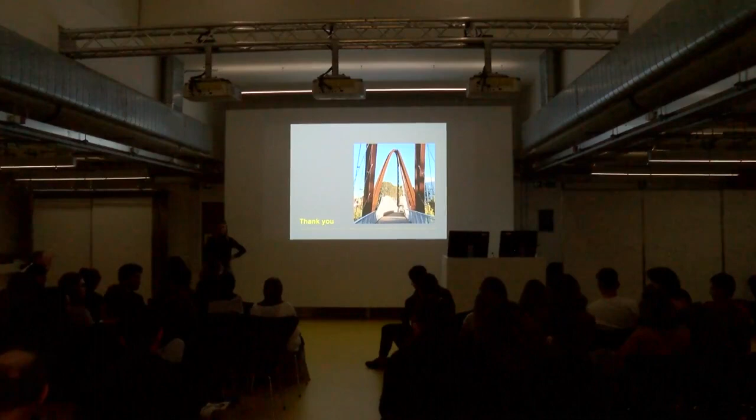Yes, of course. You were talking at one point about replacing the previous design of a concrete deck with a steel deck.

And so the priority seemed to be about making it as light as possible. But don't you need the weight to hold it down? Well, this was the dilemma, because it then got much lighter. But the concrete was in itself a walking surface as well as a spanning deck, so it was quite thick and heavy and did everything in one job.

Then we reverted to the corten steel, which was very light. But then, of course, we needed a walking surface. And we did look at bonded paint finishes on top of the steel to be super, super minimal. But in fact, there were maintenance concerns with that because it has to be reapplied. And also, we needed some weight back.

But we found that we could control the weight of the timber more, a more finessed control of the weight and distribution with the timber than we could with the concrete. So it was a kind of happy conversion from one to the other. Yes, and I suppose partly us being interested in what you could do with the corten, and also paring it back to just the three materials rather than having a fourth, which was the concrete.

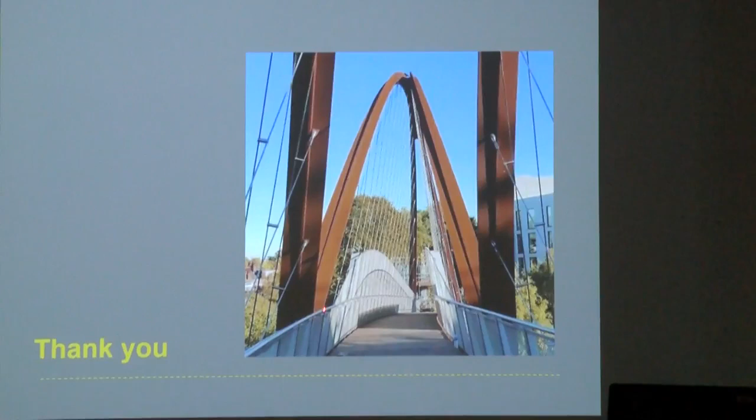Don't anyone get any ideas?

So if you got yourself out there, you could traverse along the length of this on a surface which probably feels quite safe, especially compared to the Millennium Bridge. But we then had to put this stop there. So this extended steel plate projects out, and in the end, they recognized that if you were really determined, you could get around this plate and onto the other side. But because it is an obvious sign that you shouldn't go beyond it, that's enough sometimes.

You've gone as far as you can at that point. So that's what we've done. There are two long uprights of steel plate, so if you are traversing, you'll run into this panel. Good question, though. I forgot to mention that. Anything else? Yes?

I actually want to say something, because all the students that are here might be designing quite complex projects. Some of you might go, well, I've got a little pedestrian bridge. Well, if you can design a pedestrian bridge with the degree of attention that was shown tonight, you would pass everything that you need to pass. Because in a funny way, in architecture, I do want to